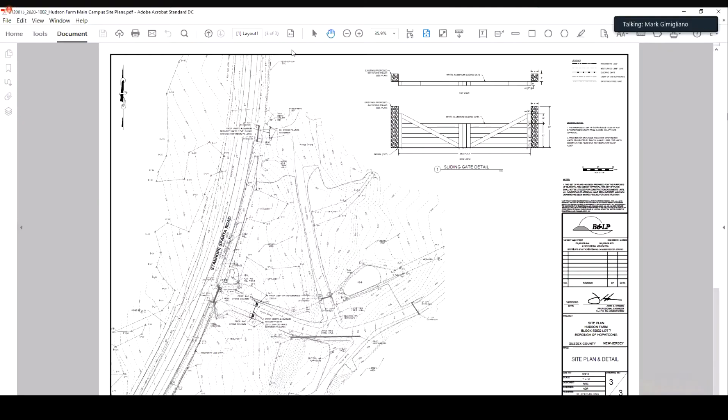Thank you. Can we get the exhibit on the screen, possibly start off with the overall exhibit? I don't know, Mark, if you have them, or if Danielle, you have them. Yeah, I can do that. Okay, there we go, perfect.

All right, so why don't you start with the easy stuff? Tell us where we are in the borough, what's on the property today, what's around it, and then we'll move into what's being proposed. Okay, well, just to start off, I brought a couple exhibits here tonight that I'll use to walk you through my testimony.

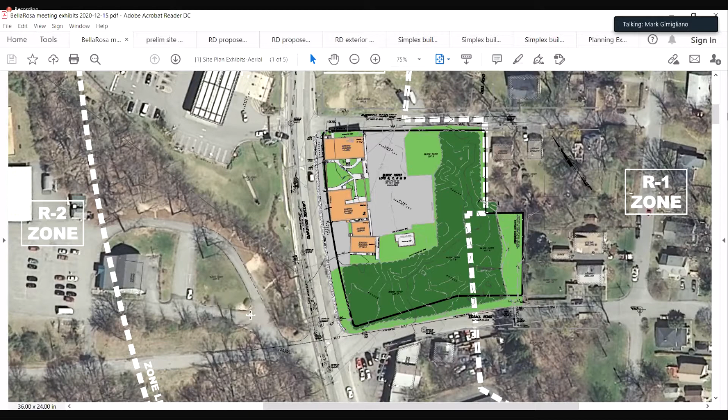The property is split zoned, as Tom mentioned. The dashed white line represents the zone limit. The front of the property, where the buildings and all the development is located, is in the B2 business zone, and the back corner of the property, the southeast corner, is in the R1 residential zone. The other development in the area, north and south along Lakeside Boulevard, is a mixture of residential, retail, and other commercial uses similar to what's on the property. To the east are all residential properties in the R1 zone, and most of them are developed with single-family homes.

There's water, sewer, and electric utilities in the right-of-way adjoining the property, and those utilities will be extended onto the property for the new development on site.

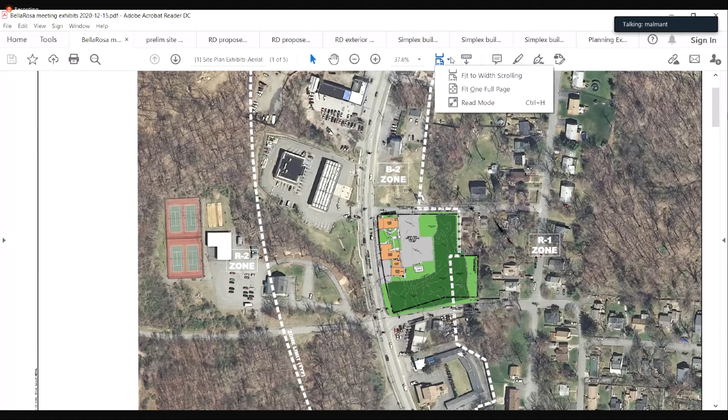Great, thank you. Just one thing I noted, where it says B2 zone, just behind Ryerson Road, it doesn't show the current building that's on that site. Is that correct, a residential building? Yeah, that's correct. This must be a little older aerial image, but there's a group home that was recently constructed at that property on the corner right next to us. Can you just point to that so we're all clear what you're talking about? Sure, it's right in this area right here where it says B2 zone.

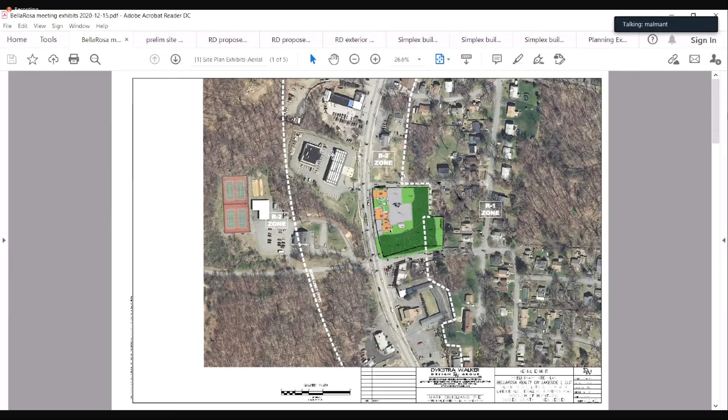Terrific, all right, why don't we go to the next exhibit and let's talk about what's being proposed. Okay, and then A2. A2 would be great, thank you. Yeah, and this is called Site Plan Exhibit. It's a colorized version of our site layout plan from the plan set that was submitted to support the application.

It also has the aerial image in the background, dated 12/15/20. In addition to the information on the site layout plan, we show the landscaping proposed for the site. So you can see here are the three existing buildings, Building 31, 33, and 35. The proposal is to remove the existing office and retail uses, most of them, from those buildings, and convert it to residential uses.

In fact, the only retail use that's going to remain is the hair salon in the corner of building 35, here in the front of the building at the corner of the property. The rest will be converted to residential apartments.

We're also proposing to construct 3 new buildings containing residential apartment and townhouse uses. We have 2 5-unit buildings on the east side of the parking lot, and a 3-unit building next to building 31 along Lakeside. In total, we will add 10 dwelling units to the property.

In addition to those new buildings, we're also proposing to construct an addition on top of the existing garage, which is right next to building 31, an existing building. There's a garage next to it with access in the rear, and there'll be a 2-story home built on top of that, used as a 2-bedroom townhome.

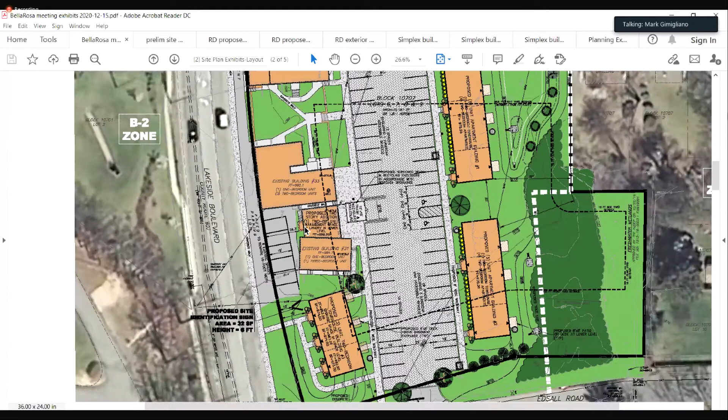Finally, we require a variance for building height. This 2-story building on top of the garage will require that building height variance. The garage has about an 8-foot elevation difference between Lakeside Boulevard and the parking lot in back, and that's how you access the garage, but it makes the roof of the garage about the same level as Lakeside Boulevard. So a 2-story addition will be built on top, and if you're standing on Lakeside Boulevard looking at the building, it'll look like a 2-story home. But if you're standing in the back of the parking lot, you'll see the 3 stories -- it'll look like a home with a walkout basement.

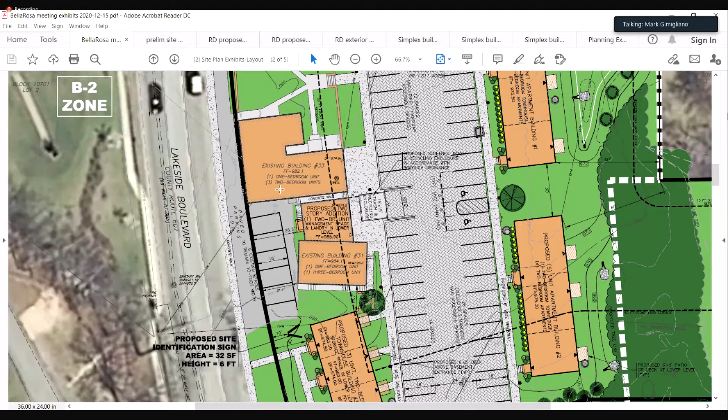The ordinance requires that we calculate building height based on the average grade around the building, and the actual height measured from average grade is 32.5 feet. 35 feet is allowed, so it complies with the height requirement. But because the first floor is more than 6 feet above average grade, the basement level is considered a story above grade, so technically it's a 3-story building. 2.5 stories are allowed, so that requires a variance. That pretty much sums up what's proposed for the project.

Okay, just a few follow-up questions. You mentioned before about having multiple structures on lots. Is the proposal to consolidate these 4 lots into 1 lot? Yes, at the end of the day the lot lines will disappear -- this will be one large parcel. Is that correct? That's correct.

Did you talk about the sidewalk on Edsall? I don't recall if you mentioned that or not. Currently there's no sidewalk on Edsall Road, and the proposal is to construct curbing to connect our curbing on site to the curbing on Lakeside, and also construct a sidewalk so there'll be a pedestrian connection between our parking lot and the sidewalk on Lakeside.

On Ryerson, there's no proposed improvement -- is that correct? Ryerson already has curbing between our driveway entrance and Lakeside, and I believe, looking at old resolutions, it was approved as part of one of them for access to the mailbox. To the east of our driveway entrance, we're going to extend curbing onto Ryerson and end it about halfway, a little more than halfway down our property.

And lastly, you mentioned there's no need for DEP approval -- that's because we're staying out of the wetlands and transition areas, is that correct? That's correct. And that really creates the buffer you see on the right-hand side of the screen that's largely untouched, is that correct? Yes, pretty much the limit between the B2 zone and the R1 zone is about where the transition area is located, and that's where our grading and any land disturbance will end.

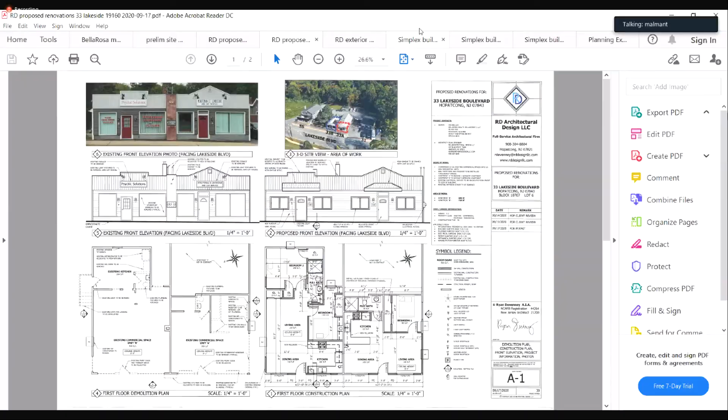Okay, I'm here. Hi, I'm Bob Mazzola, and we've decided to— Bob, hold on. Bob, relax, just wait to be called, please. Okay, sorry. Any other questions from the board for Mr. Devaney? No? Anybody from the board? No? Okay, Mr. Malmant, you can move on to Mazzola if you'd like.

I'll call Mr. Mazzola, who's already been sworn. Okay, hi, Mr.— Mazzola. Yeah, just tell us, if you will, who you're employed by and what your position is, please. I'm the owner of Atrium Development.

It's a modular construction company. I've been in the business since 1982, constructing modular homes basically in northern Jersey. We've actually put a few of them in Hopatcong and surrounding towns. The reason we've decided to go modular is that it's going to reduce the construction time and of course the number of vehicles coming into the site and surrounding areas.

The 3 buildings that are going in will be nicely appointed, and the siding is going to match the other buildings. The 5-unit building, they're all 2 bedrooms.

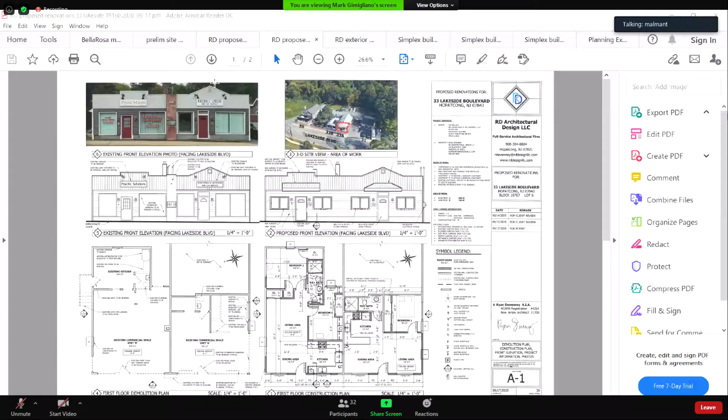Bob, did we get the exhibit up? Mark, can you get that up so we can start to show the board what Bob is referring to? VA5? Yeah, let's see, that's the 5-unit. This is just for the record, this is a plan that's already on file with the board. It has not been changed, but we can still mark it as A5 if you'd like.

This particular building has 5 apartments, they're all 2 bedrooms. There's 2 of them on the first floor and 2 on the second floor, and the one on the right is sort of like a townhouse unit. The 4 units are approximately 794 square feet, and the larger one is about 1320 square feet.

They're all, as I said, 2 bedrooms, 1.5 baths, and the siding is going to be vinyl siding. The exterior is going to have nice shutters, architectural shingles. We're going to try and make it really a nice looking building.

Are they multi-floor, 2-story buildings? Yeah, 2 stories. In this particular building, the one with the door on the left, there's 2 apartments on the first floor. If you go back to the floor plan, you can see it. Okay, that's the first floor, you'll see it kind of mirrored.

There's a living room on each side. Now, with some other buildings in town we ran into a problem with ADA requirements — do we have a similar problem here? That's up to Ryan to answer, I think, as far as the ADA requirements.

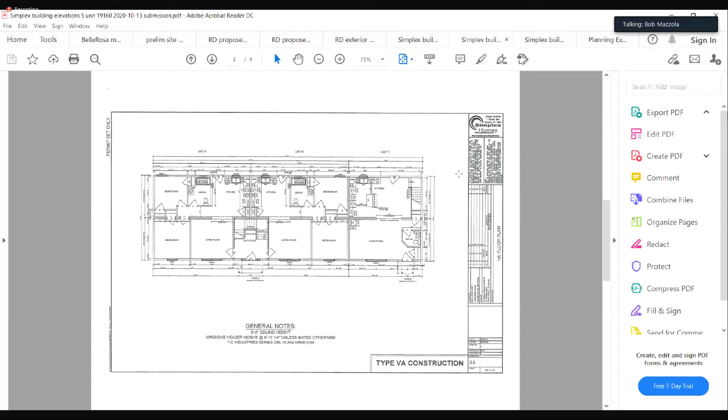So the common wall to the same unit, are you going to have 2 walls up there or 1 wall? Up in the attic, there'll be a wall along the separating ridge, separating each unit. There'll be 2 firewalls in the attic, separating each unit. Yeah, there they are, right there.

So, can you see my mouse? No. No, I'm the one that's got it under control.

You've talked about the 5-unit building. The three apartment building is basically the same design. Are these all townhouses? Yeah, these are townhouses. Each apartment is a 2-story.

Can you get to the floor plan? And this is the building facing the street, is that correct? Right. So tell us about this building.

Okay, these are 3 identical apartments. As you can see, there's a living room, dining room, kitchen on the first floor, and each one a half bath. And then there's a staircase going up to the second floor, with 2 bedrooms and a bath. You can see that little box opposite the shower - that's the attic access, if you have to get into the attic to service the furnace that's up there.

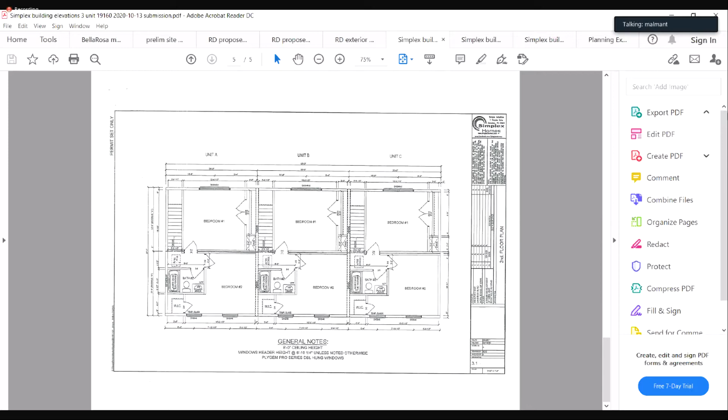Well, it's actually not going to be a furnace, it's going to be a heat pump system. And this building will be the same finishes as the other buildings? Yep, same finishes, yes.

This building will have a full basement. If you go to the rear elevation, it'll be a full basement. Yeah, and that basement will walk out to the parking lot in the back.

And we have not marked these. These are the exact same plans on file with the board. There were no changes made to them. Is that right, Bob? Right, exactly.

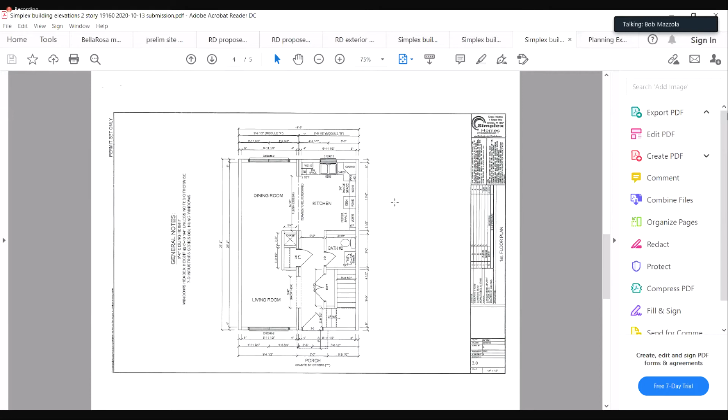And the 2-story building, the walkout we were talking about before, in the rear, that's going to be a laundry area. Yeah, the building on top of the garage, correct? Yeah, the garage area is going to be converted into a laundry room for all the units. So maybe 3 washer dryers.

Yeah, I think I have this, this is what that one will look like from the back. Yeah, exactly right. And this was submitted to the board as well.

So basically, the new 2-story structure is being installed on top of the existing garage, and the garage is being converted to a laundry room. Right. It's basically a poured concrete foundation with steel beams going across, every 7 feet I think. So it's been checked out.

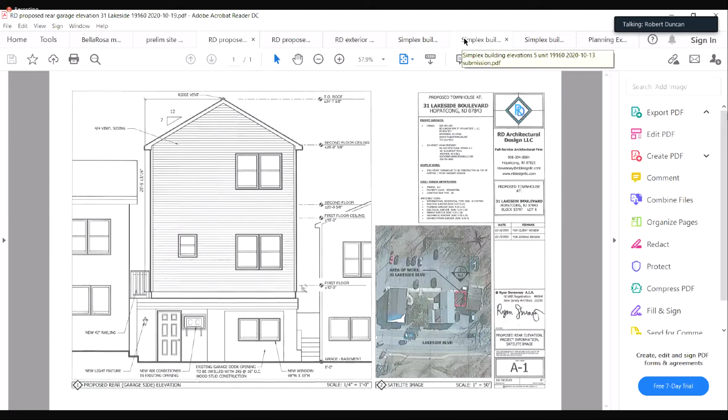Very sturdy. Okay, any questions for Mr. Mazzola? What does type VA construction mean? Type VA, where is that? I don't see that. It's on one of the plans, I guess, for the 5-unit. I saw that, Type VA construction. Oh, 5A, I think it's at 5A.

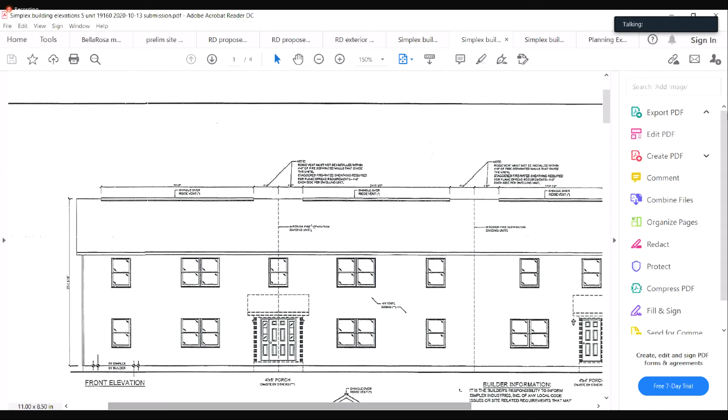Can you blow that up, Mark? Okay, possibly. What's 5A construction? 5A construction generally refers to a building that's more than 2 stories, more than a multifamily. It has some additional fire codes and so forth, that's 5A construction. These buildings aren't sprinkled, right? I think they're going to be sprinkled, yeah.

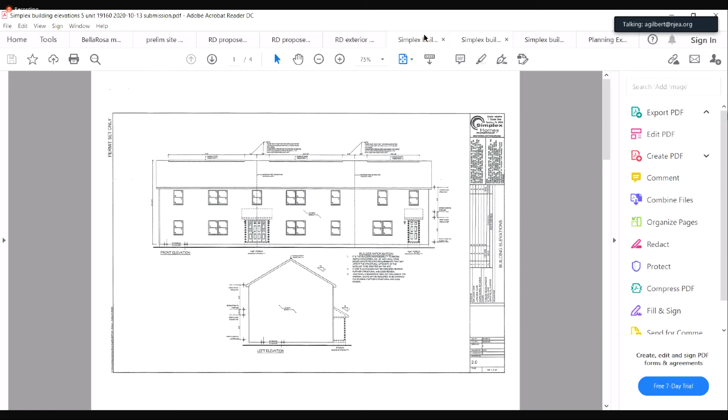You mentioned that you would put other modular homes in Hopatcong. Can you tell us where there might be some? Well, I'd have to go look up the addresses. I don't remember them offhand, but I can give you some. Okay. But they would have been single family, correct? They're all single families, smaller homes.

How long have you done multifamily? Well, I've been doing multifamily in conjunction with single family, mainly 2 families. I've done some 8 families, storefronts, some commercial, but mostly all residential and mostly all single families. Where are they manufactured? For the first 25 years, I was working with a company called Penn Lyon Homes, and in 2010 they closed the factory with the financial crisis. For the last 10 years, I've been working with a company called Simplex Homes out of Scranton, Pennsylvania. They're the manufacturer.

Is the laundry area in the garage for all the residential units and the whole project? Is that how that's set up?

I have to talk to Ken about that. I understand the laundry area is - I don't know if it's for the entire project or just these new units. Yeah, I think the laundry area is going to be for all the residents in all the buildings. Okay, just wondering.

The new building that's 3 units, the one that has frontage on Lakeside Boulevard, has a walkout basement. Is that basement level shown in the architectural plans? Yeah, it's what's shown in the back, if you flip to that slide. Is there a floor plan for that level?

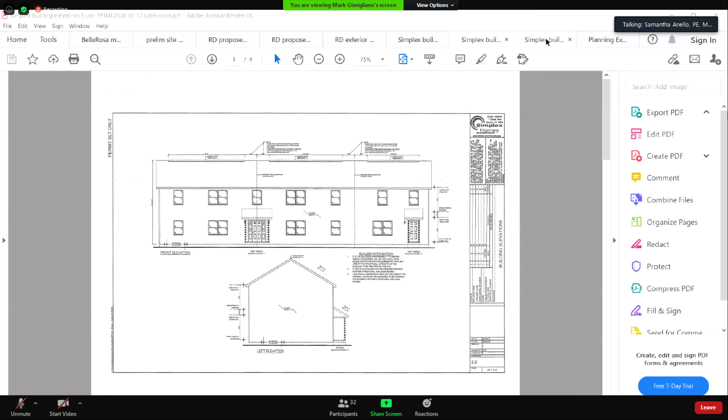It's just gonna be one big open basement room. There's the door and you can walk in, it's one big area. I don't think there's a floor plan, but just get that on the record - is it a large finished room or unfinished? It's unfinished. Full height ceilings though? It'll be full height, yeah.

So that's one under each unit? Under each unit, yep. And there'll be a dividing firewall between each unit. Is that masonry or - well, if you're familiar with superior walls, all the foundations are going to be superior walls. They usually have concrete studs and insulation, but they can make a solid wall. So the walls between the units will be solid walls, meaning there'll be concrete on both sides.

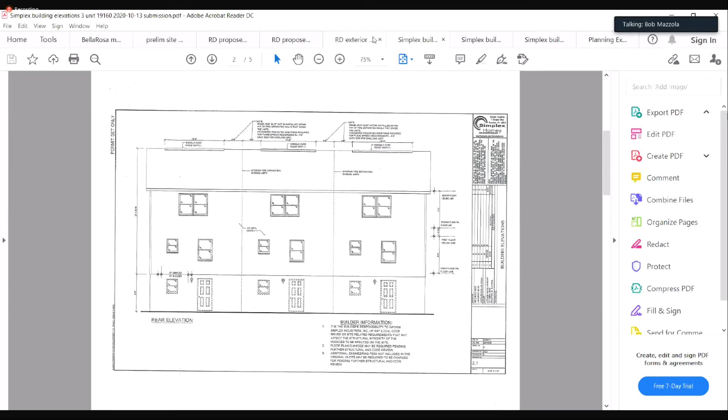And I just want to clarify on the laundry facilities. There's already laundry facilities in building number 35, the one at the corner of Ryerson and Lakeside. So this will be an additional laundry area for all the residents.

So that won't be an elective in the units then? People won't have the option to get a washer dryer? There'll be no washer and dryers in the units.

Okay, any other questions or comments from the board? Yeah, Alan, I have one. It's with regards to the traffic impacts. I think both the statements from the engineer and the board were a bit subjective. It'd be good to have some factual data to make sure we are not impacting it. I trust that statement's true, I don't think there's gonna be that much additional traffic added, but we should have something to back that statement up.

What's the net gain between loss of business spaces and gain of residential spaces? What's that net calculation? How many cars?

I just want to chime in one second, Bob. I think we should also look at capacity of the roadway, which should be easy to look up - what a residential capacity should be for a road that size. I mean, the amount of cars is probably higher than most people think, but we should have data to back that up.

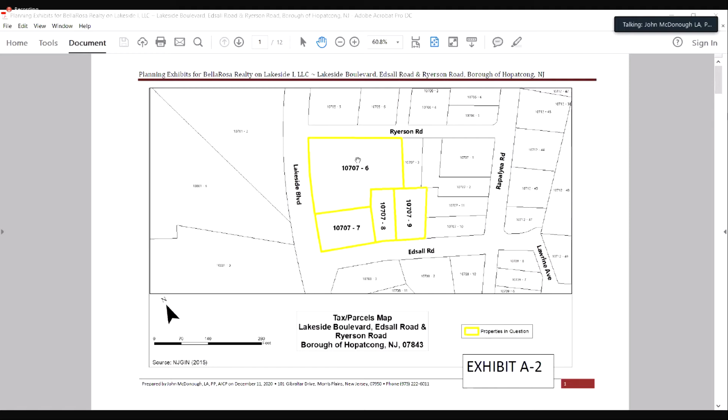As you've heard, what the applicant essentially is looking to do is complete the puzzle here with one integrated development, filling the voids with new buildings that will frame the parking lot. The building masses become the buffer, if you will, that will shield the active land use, the open-air surface parking lot, from the adjacent residents, sensitive receptors further to the east down Ryerson Road. As you know, this is a development and a terrain that steps down topographically from Lakeside.

So this is going to be a nice little pocket development, very nice privacy, very conducive to residential use given the way it's set back off of Lakeside Boulevard.

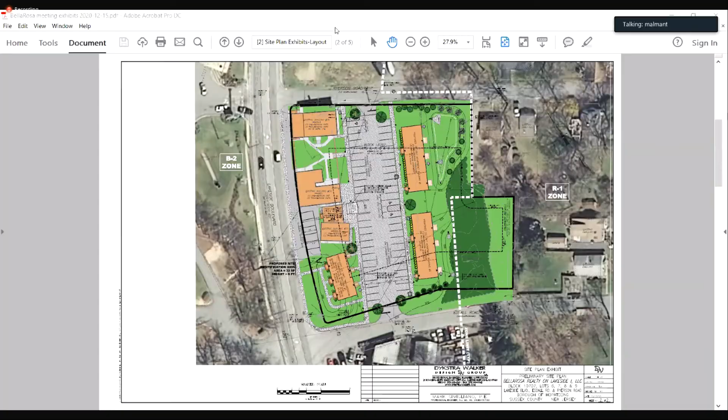Yeah, I have a couple of questions. You mentioned ADA, and I don't have the plans in front of me, but I don't see any handicapped parking spots. Mr. Chairman, I'm sure they're there, and I'm going to roll that one right back to Mark because I know handicap is part of the plan here.

Okay, and what about—we have a place over near River Styx where we had some buildings put up with apartments or townhouses, whatever you want to call them, and we ran into a problem with ADA requirements that you had to have at least one unit which was ADA compatible. Do we have a similar problem here?

I would think, Mr. Chairman—let me throw something back up on the screen. I'm not the architect, but I would think that newer unit, the lower unit on building number 31, certainly is flush and has accessibility. It's certainly ADA adaptable, which I think is a requirement under the building code, that it be adaptable for use by a handicapped person. I'll have to defer to an architect because I'm getting out of my line of testimony, but from a practical planning standpoint, that lower unit, or the one over at 35, is certainly ADA adaptable.

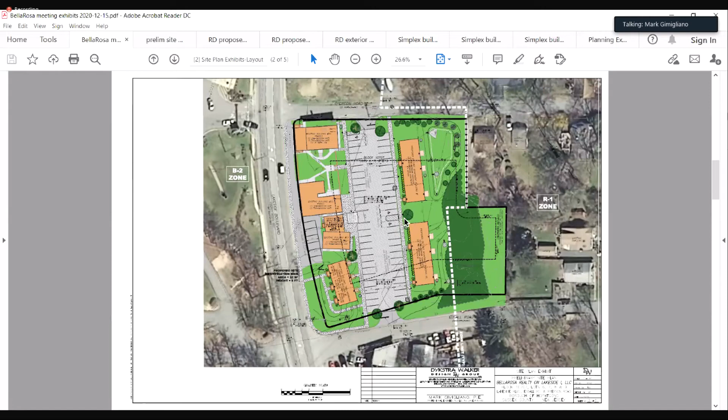The ADA parking spaces are right here in the center of the parking lot, and the ground floor apartments in the 2 five-unit buildings can be ADA accessible. So how many handicapped spaces do you have? We have 3 handicapped spaces - 2 here in the center and 1 near the existing building number 35. But as Samantha mentioned, those can be relocated depending on where the ADA accessible units end up.

Okay, my question before was what is the net need for parking when you discount what's leaving as commercial and those requirements, what's being added residential in the existing buildings, and what's being added residential in the new buildings and the 2-story over the garage. What's the net number of spaces required, and what's that proportion with the handicap? We are required to have 58 parking spaces with the additional residential units, and for a lot with 58 spaces, you're required to have 3 handicap accessible spaces, one of which has to be van accessible, and we comply with that requirement.

That's the overall entire project area, 58. That's correct. Okay, now the planner said there was not much impact to the residential. I go back to Bob's question with the impact on the traffic. That does have some impact there, and it's not negligible.

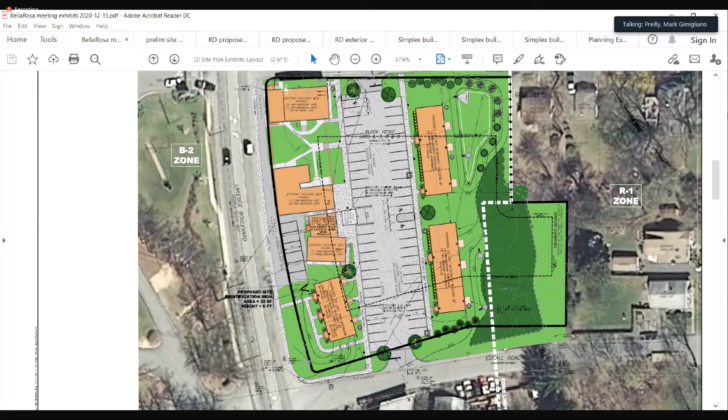Can you show the front of that building for a second? Yes. Yeah, that building just looks out of place, this is just my observation, relative to the other buildings. You've got a 2-story building on the left-hand side, a 2-story building on the right-hand side, and it looks like... I'm just wondering if there's anything you can do better from an architectural point of view to make it look more like the other buildings. To me it looks out of place. That's all, just an observation.

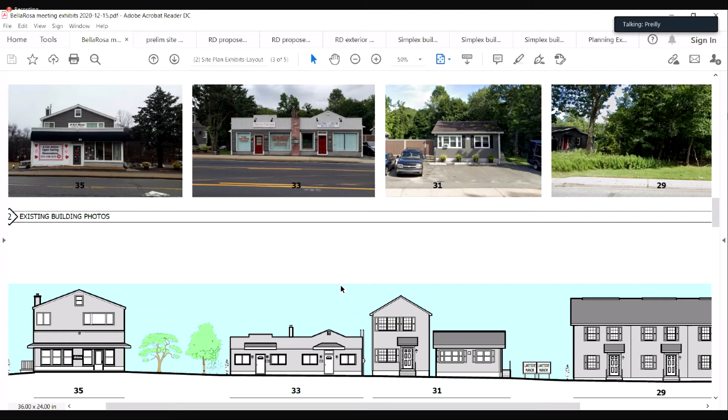Well, it will be re-sided and new windows put in. Maybe Ryan, perhaps you can jump in. But as an example, the building on the left has got a square top, and the second half of the building's got a triangular top. Why don't you make them look exactly the same? They just look out of place on that facade, and I think there's something you could do to make it a little more eye-pleasing. That's just an observation, that's all.

In concert with that, go to the back end of those buildings and look at what the new condos are going to look like. It's very diversified in the back. So I'd almost say, is there any way you can make those 2 buildings 2 stories? It would fit much better into that whole plan than having 2 single-story buildings sitting next to each other. Well, it's probably a difficult question.

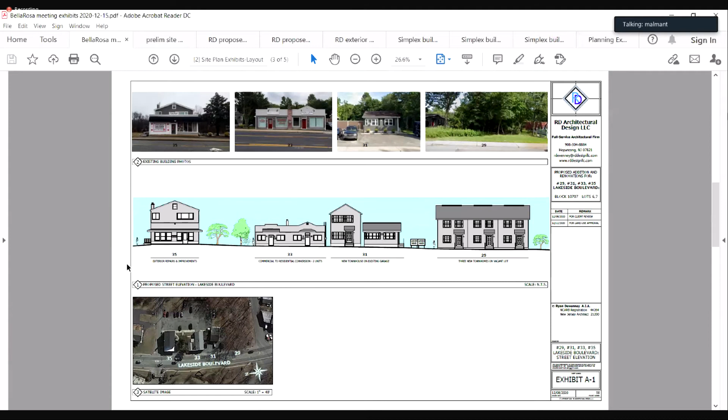I understand the point, but whether that foundation can support a 2nd story, I don't know the answer to that. It would require additional parking, additional density. So at this point, it's not being proposed as part of the application. Well, the garage is getting a big load on it. The garage is built, as you heard before, with reinforced concrete and steel beams. It's a different structure than building 33.

Well, that building to me just looks completely out of place in what you're trying to do. Just looks totally out of place. Something could be done to the front of it to make it blend in. For them to take into consideration. Yep, that's all. Okay, appreciate the comment.

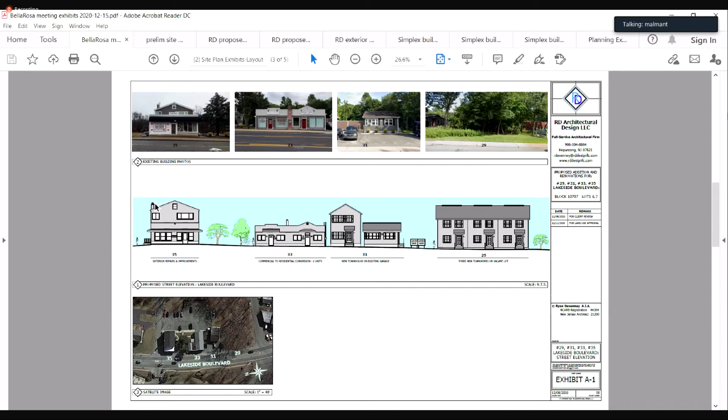Anything else? Any other questions from the board members? Okay, Mr. Malmant, do you want to wrap things up before I open it to the public? Well, yeah, I guess there's a question about whether you want a traffic report. I'm not sure whether the board's inclined to vote this evening or have us come back and talk about that. I would like the public to talk before I do any kind of summation, just so I understand what all the issues are. But why don't we open it to the public and see what we got?

Okay, let's open this to the public. Would anybody from the public like to comment or question anything about this application? Anybody at all? Yes, I would. Who is that? Brian Attas. Brian Attas, okay, Mr. Attas, you're going to have to be sworn in first.

Okay, Bill, you want to swear him in please? Would you please raise your right hand? Do you swear the testimony you're about to give will be the truth, the whole truth, and nothing but the truth? Yes. And spell your last name. Attas. Okay, go ahead Mr. Attas, what do you have to say?

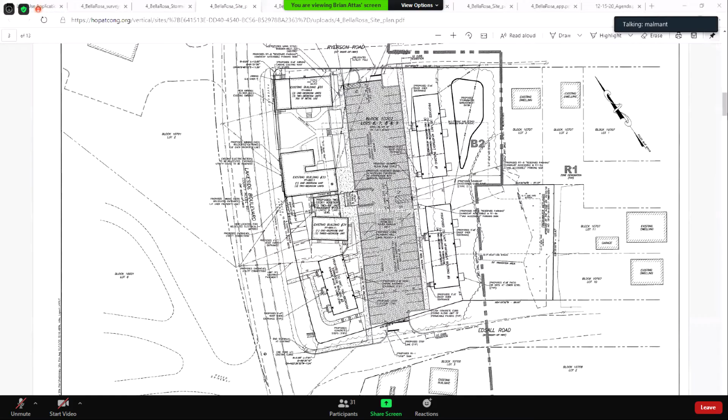Okay, so if you don't mind, I'm going to share my screen just so I can show some illustrations here. Mr. Attas, where do you reside? Okay, so I'm going to point that out right now. So you're seeing a map right now, correct? Yes. Okay, so I'm in block here, my big blue cursor, 10707 lot 11. So I'm directly behind those wetlands, and pretty much behind where you guys are actually building. So I have some questions and some comments.

The first question I have is on the wetlands, and related to that basin, is that an open basin or is it something that's sort of underground? The basin in the northwest corner of the property is a shallow open basin. Okay, and that's going to drain into the wetlands over here, correct? It'll drain towards the wetlands, but yes, the water from that basin will ultimately run into the wetlands.

Okay, and then that goes across Edsall through the back here and out to some drainage system that nobody has ever been able to really define to me. But you guys are not making any improvements on this side of Edsall or into the wetlands area for drainage, are you? None are proposed on the plan right now.

Samantha's comments asked for us to take a regional look at the wetlands to make sure that we're not adding additional water or causing any negative impacts from this development to that pipe. So we're going to evaluate that as part of our review and conformance with the board engineer's comments.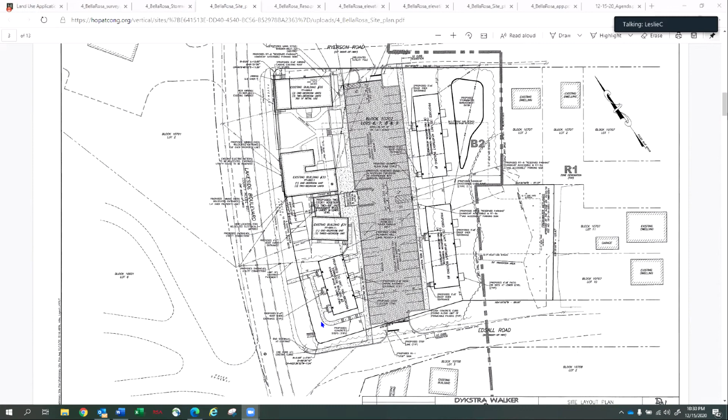Okay, thank you all. Is there anyone else from the public who would like to comment or question anything about this application?

Leslie? I would. Yes, you're going to have to be sworn in, please. Kindly raise your right hand. Do you swear the testimony you're about to give will be the truth, the whole truth, and nothing but the truth? Yes, I do. And your name? Leslie Coale, C-O-A-L-E. And where do you live, Ms. Coale? 109 Francis. Okay, go ahead and ask your question or make your comments, whatever you want to do.

Okay, first of all, as Mr. Addis mentioned, I've lived here for 53 years, and it's a horror story trying to pull out of Ryerson and Edsall. I'm sorry, Mr. Chairman, if I could interrupt, I apologize.

Mr. Mullman, I guess, dropped out, and he's trying to call in, and he needs the secretary to allow him. Okay Ron, can you let Mr. Mullman back in? Hold on a second please, Ms. Coale, just let them in. Okay, let's wait a moment till he comes in. This is Tom Mullman, can you hear me okay? Yes. I apologize, my internet connection just went down, so I'm on the phone — I can't see the screen but I can hear what you're saying.

Okay, Ms. Coale, you're on. Thank you. Like I said, I agree with several points Mr. Addis mentioned — trying to pull out of both Edsall and Ryerson is a nightmare. I can't even imagine what it's like during rush hour. I've never had to do that, I've lived here 53 years, but I have had occasion to use those roads. Also, you have to cross three lanes, and I consider that turn lane a lane because there's people there, and you have to consider the traffic. So if somebody's in there, you can't get past that. The QuickChek is extremely busy, so you have to take that into consideration. You have people going left and right from there, and people going left and right from both. Well, specifically Ryerson I think would be the biggest problem there.